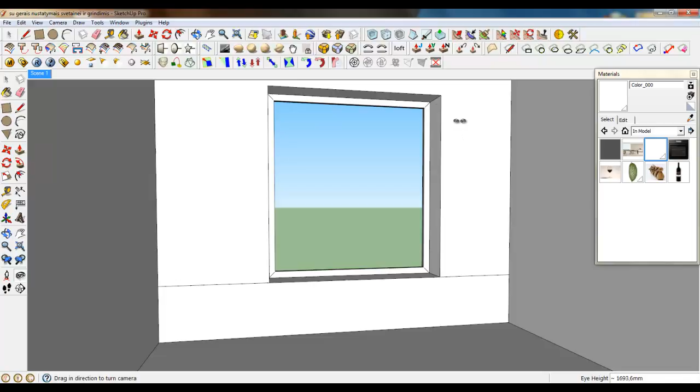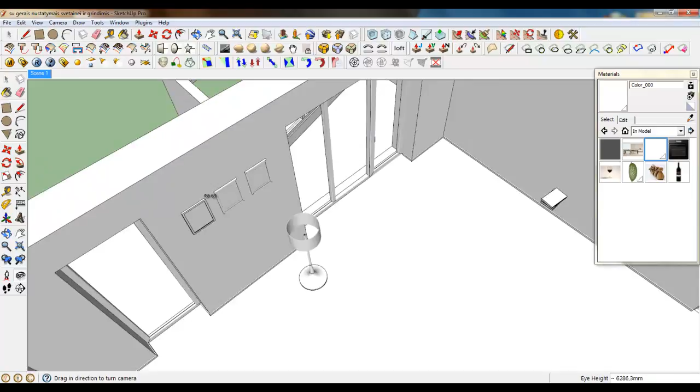Firstly, I've erased everything what was in this zone. You can see the only thing left is a lamp. I'm going to adjust it and fit it on the cabinets near the bed. Also left some pictures to copy and books.

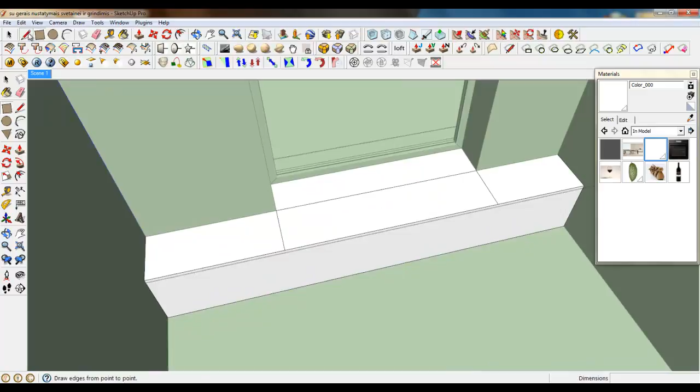So firstly, let's create a cabinet with drawers to put some beddings and pillows in it. Select these two faces, make a group, and extrude this face by pushing Ctrl on your keyboard for 400 millimeters. It will be enough to sit, about 700 millimeters. So delete these faces.

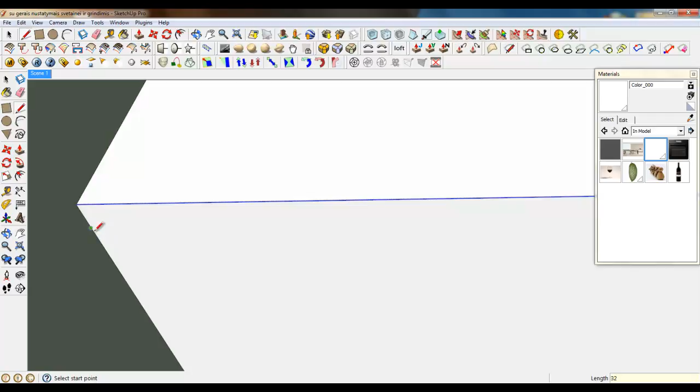Divide this face into 3 segments. Create 2 lines and also create this line, set it for 32, and create a horizontal line. Also we can now delete these lines and using the offset tool, type in 1, 1 and 1 again.

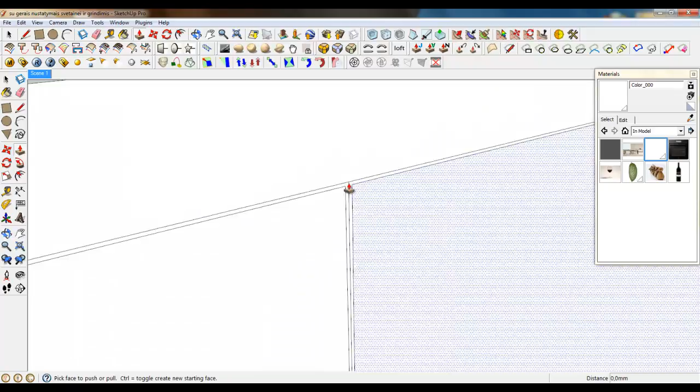We can now push these faces by 18 millimeters. Let's type 18, 18, and this face also to 18.

Grab the drawer facades and using 3.6 millimeters and 6 segments, round the edges.

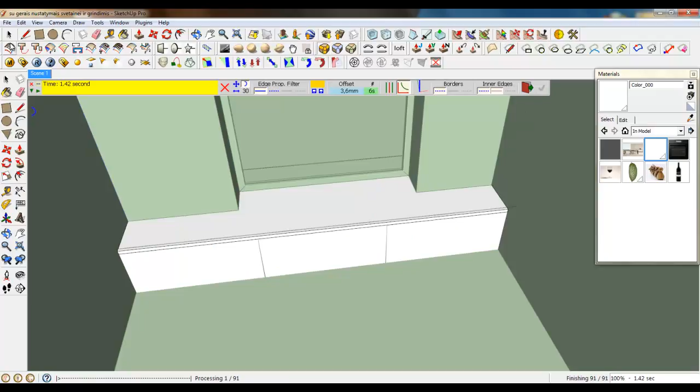So round the edges and also round the edge of the top, and let's say it's 1 millimeter and 3 segments. Well, let it be 1 millimeter in this case and 6 segments.

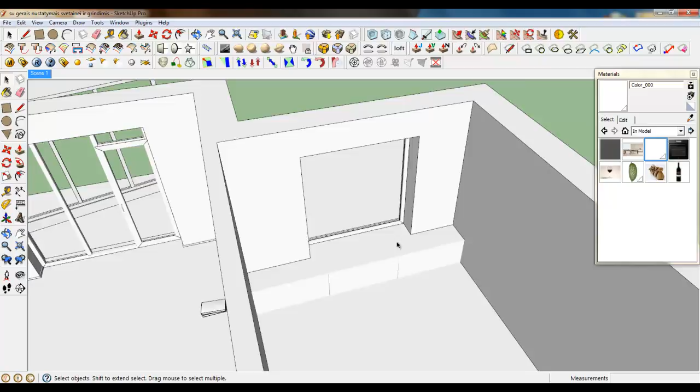Now let's create, by the way, these drawers without handles because we use a system where you can push and it automatically opens. And now let's create a pillow to sit on it.

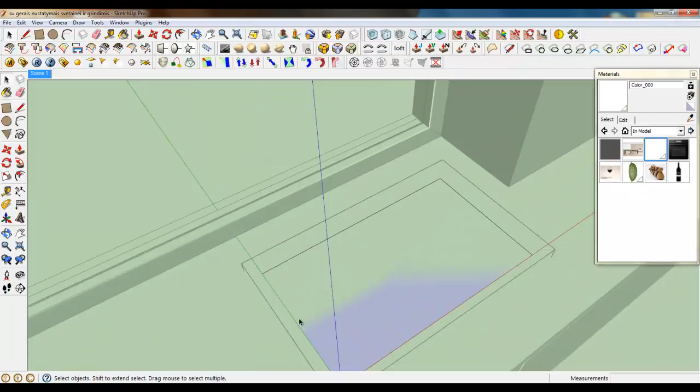So it's a simple rectangle. Make a group and open it. Now let's make the color white and divide this face. 6 segments is okay.

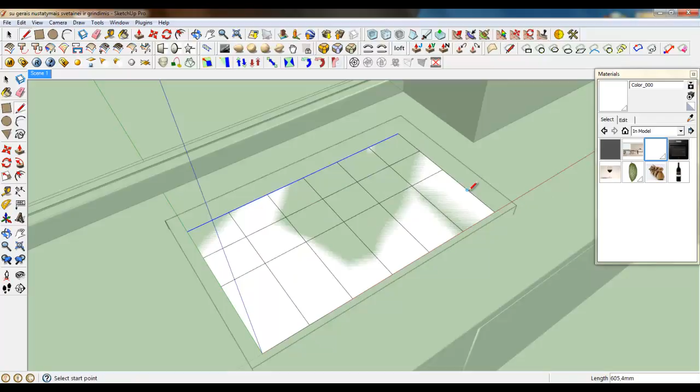And with the line tool, let's cut it. Also cut it not only vertically but also horizontally using midpoints. It's good. Let's select everything, click on the line 3 times and rotate it. Also grab the middle point and move it.

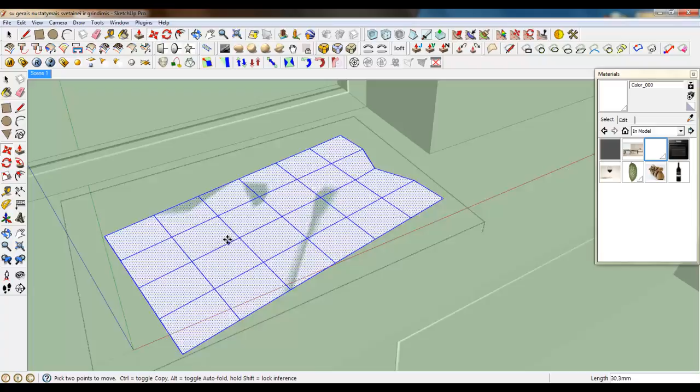Now select everything again and move all the faces to the corner. Well, it's too much, go back and grab this corner. Let's adjust them - well, we are making a sculpting now with SketchUp tools.

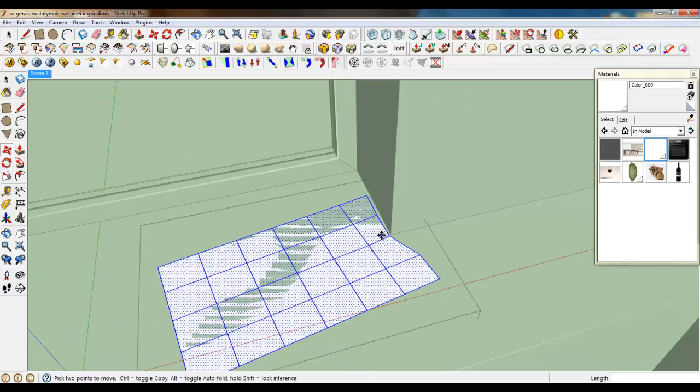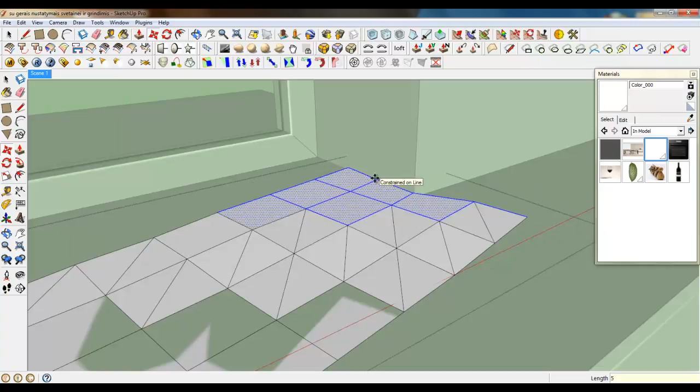So grab something about half of the faces and lift them, let's say at 5 millimeters. Deselect some faces and grab and lift up the left ones again by 5 millimeters, and do some adjustments. I am only grabbing and lifting up the corners.

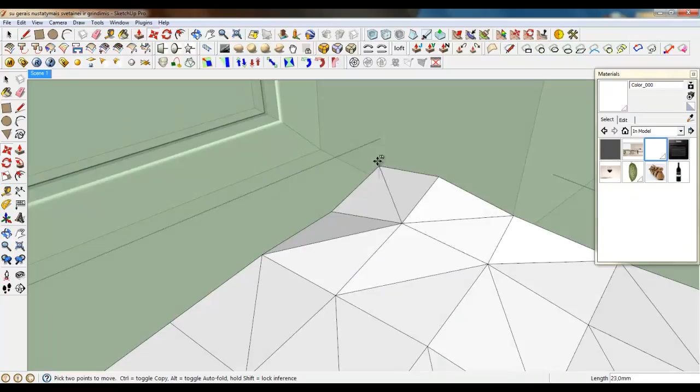And then after we are done, we are going to use a subdivide and smooth tool. Well, firstly maybe a joint push/pull tool to extrude the faces. It's good now.

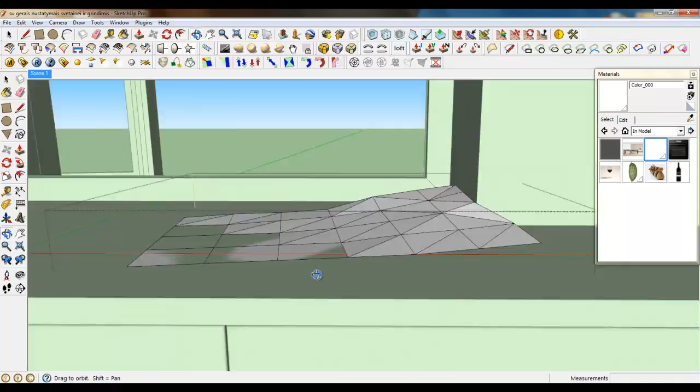Well, let's lift up this face more. It's getting better now. Yeah, it's done now.

So let's select everything and use the joint push pull tool. Type in 13 millimeters, 2 times enter, and it's okay.

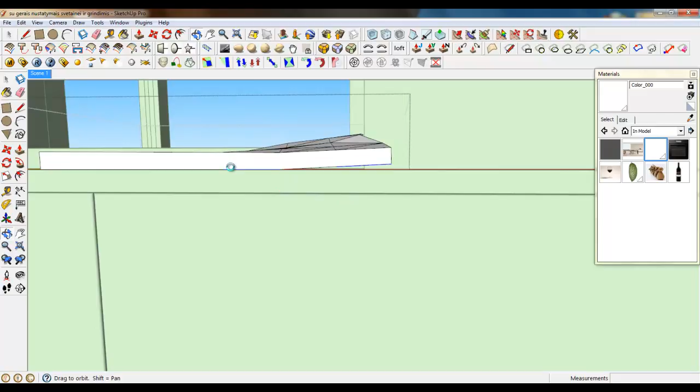Well, maybe we should fix this corner. So go back, lift up this corner and down this one. Lift up this and this.

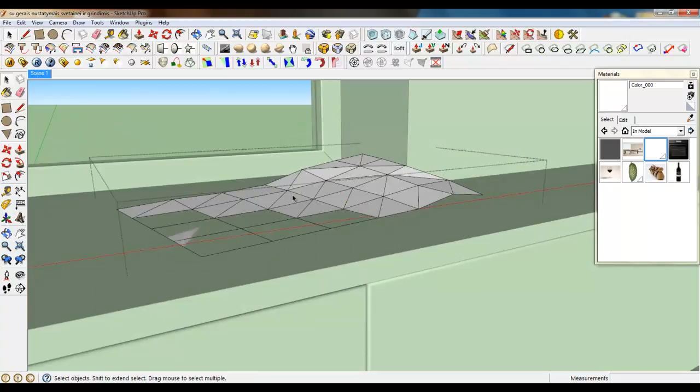It's better now. Let's add some joint push pull, 13 millimeters, enter and enter again.

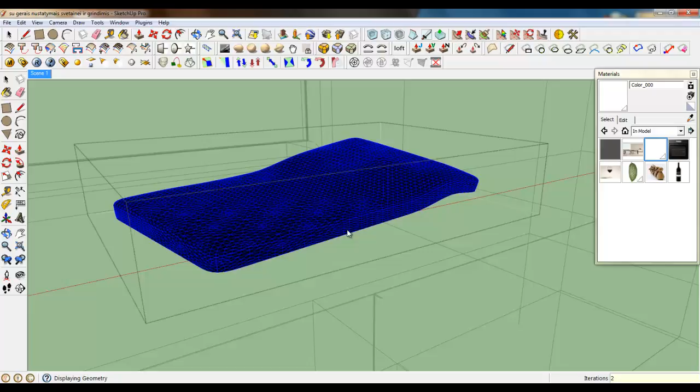Now everything selected and subdivide selection, and again to subdivide and smooth, with 2 iterations. Click OK. So our pillow is finished.

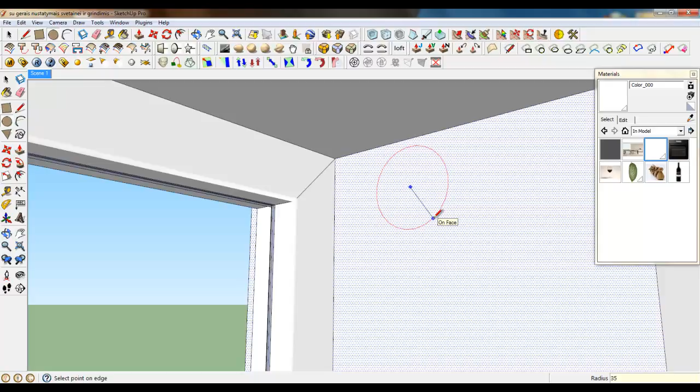It looks quite realistic, and well, let's model now a blinds window cover. So create a circle and type in 35 millimeters. We don't need much segments, so leave the default value and make a group.

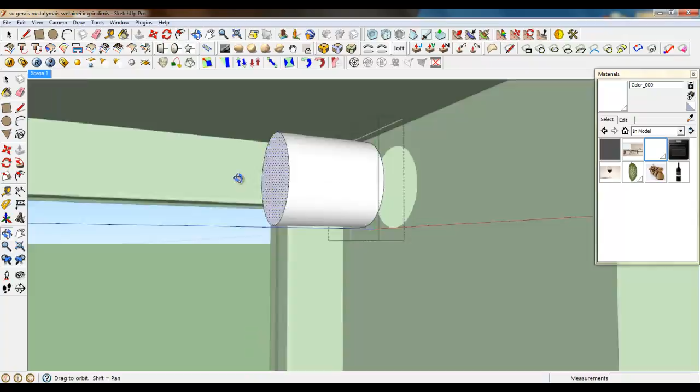Well, maybe let's move this circle for about 13 millimeters and just now extrude it. Also leave some space like I've done.

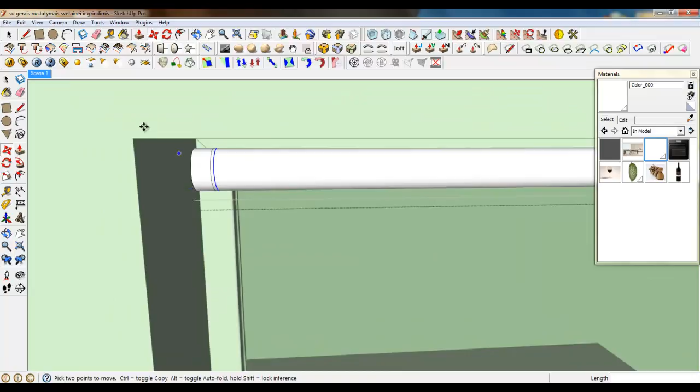Now copy 2 lines, 13 millimeters and 5 millimeters. Do the same thing on this side, 13 millimeters and 5 millimeters.

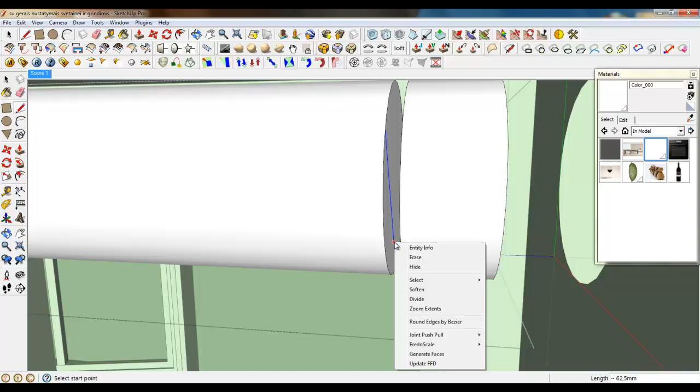Let's erase and close the faces. I showed you this way, and now it's a second time, but well, now connect the faces and do the same thing on this side.

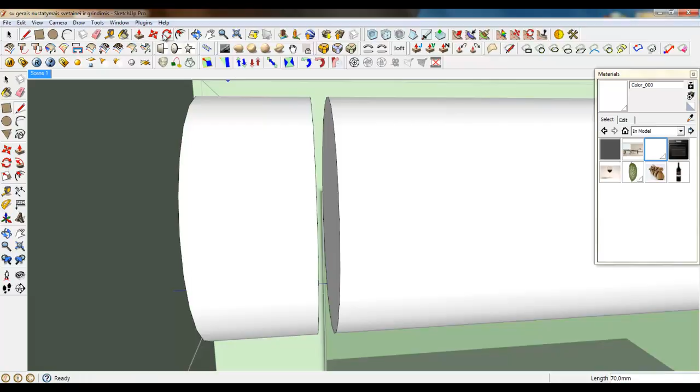Close the faces, use the offset tool and join them. Erase the line, offset tool and join. Now only select the edges and we are going to round them.

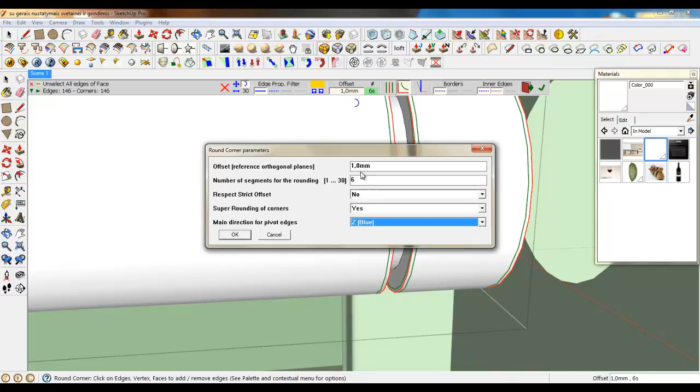You see we need more, so let's type in 2 and 3 segments. And we only have left to create a handle for it.

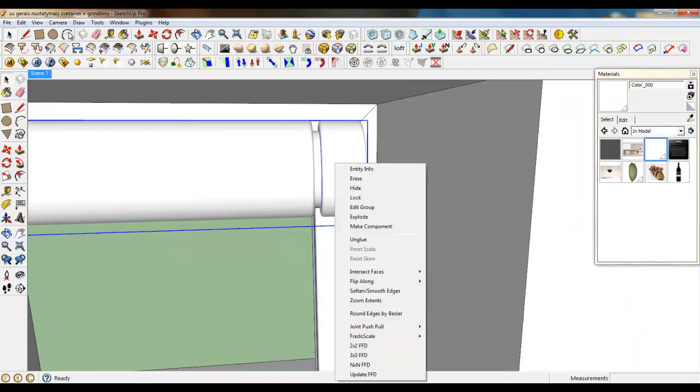So after processing is done, we will create it. Well, it's okay. Now create a simple rectangle on the wall. Make it thinner.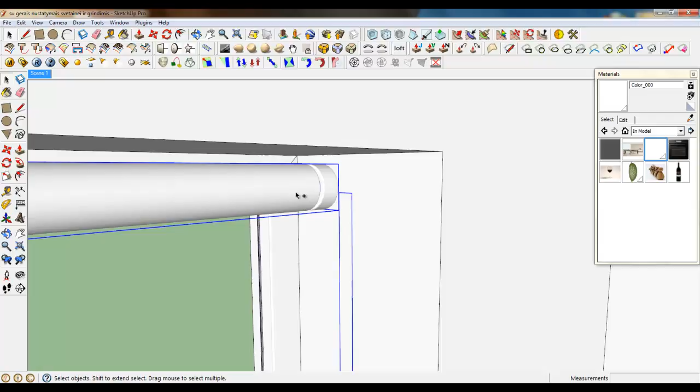Select on the lines and also a cylinder, make a group and open it. We have some lines down there, so let's grab them, select everything, grab them and position in this face.

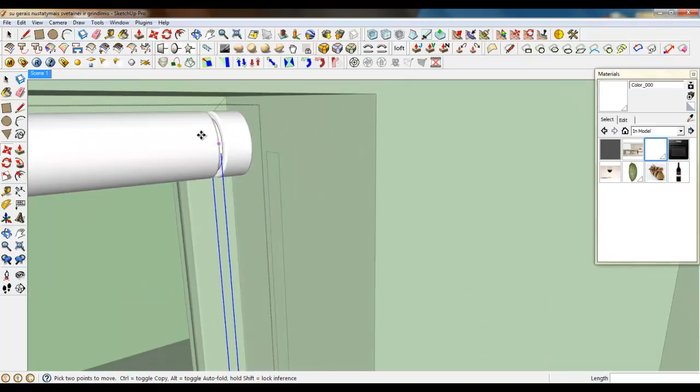It's okay, only let's create some arc. Delete these lines and well, create another arc much bigger.

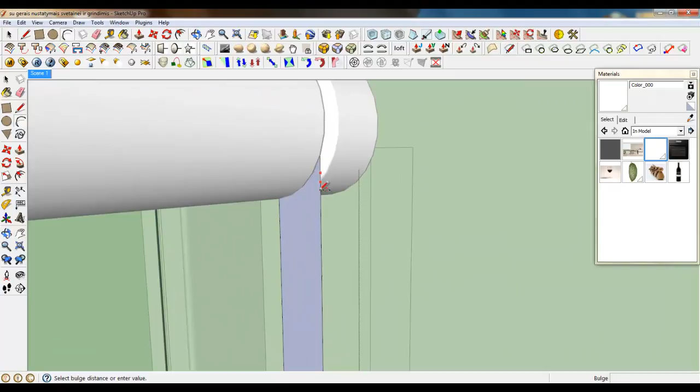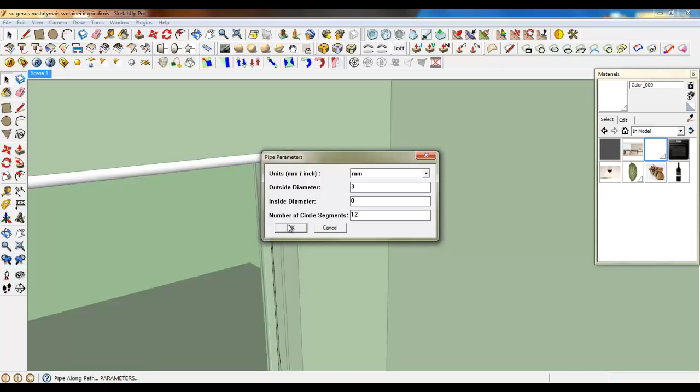It's good, and now using the pipe along path tool, we are going to create a pipe over this face, over these lines. Select everything and go to plugins, pipe along path. Let's type in 3 millimeters, 0, and 12 segments. It's done now, it looks okay.

So we have created a cabinet with drawers for storage of beddings, also a pillow, blinds, a window cover. So let's copy some books from the living room.

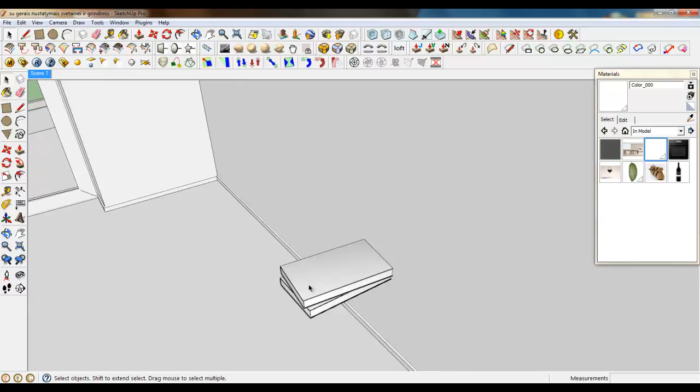I left them in case I can copy them, not model again. Yes, copy them. Also, maybe we could scale them, they are far way too big.

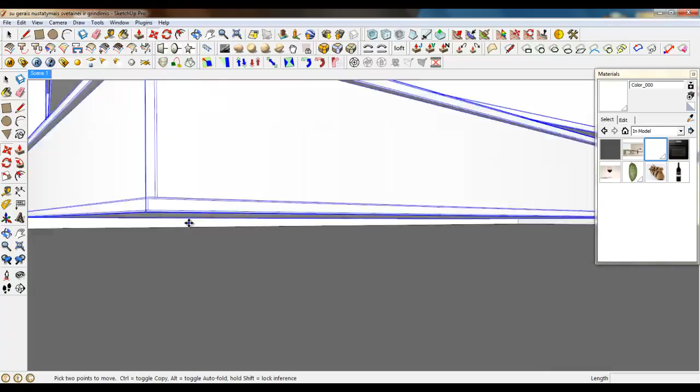Place them firstly, and now we can scale them. It's good now.

Also, let's copy some pictures, and three of them is okay. So grab a corner, copy, and place them on this wall.

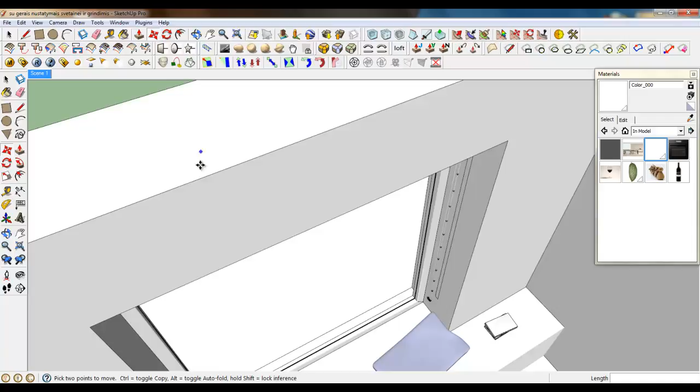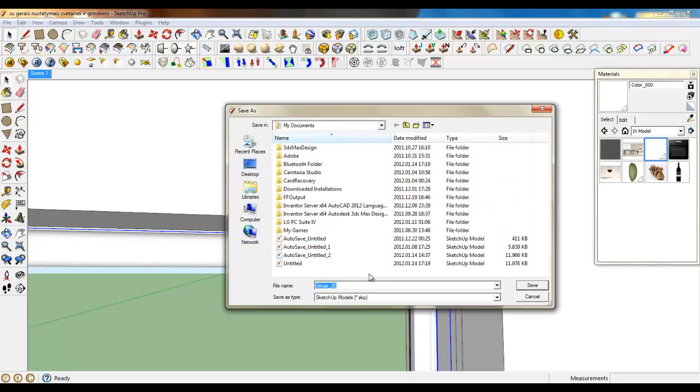Also, you can copy this blind on the windows in the living room and dining room zones, or if you want them in a different scene, you can make a component and click Save As, choose a directory in which you want to save an SKP file, and then you just can grab a file and import it into the model you want.

So this was the first tutorial of modeling a bedroom. See you on the next lesson.